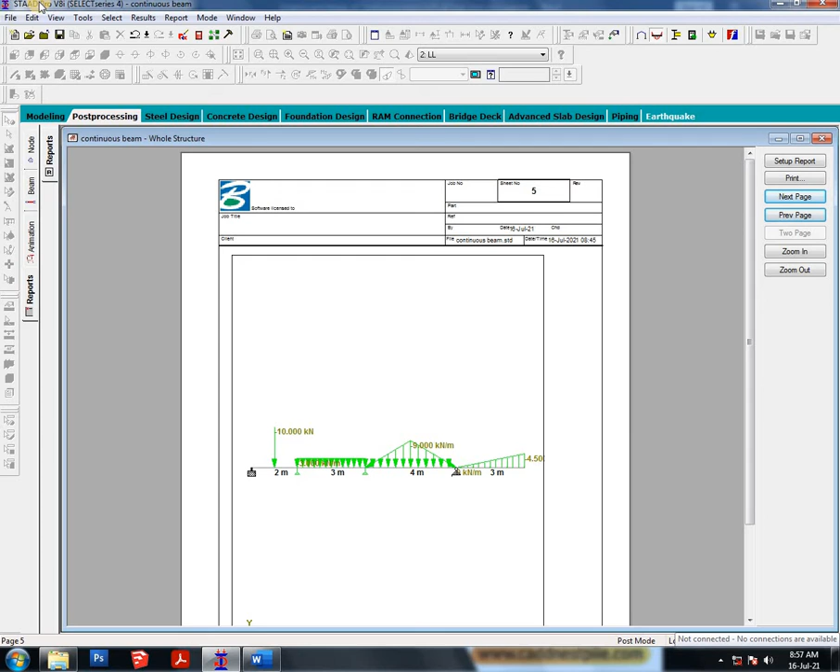File, new, the first one is space, then meter and kilonewton, then next. Here I am going to select the add beam option, then finish. The page will open. This is our user interface. Under modeling, the first step is setup, and under setup the first step is job.

Job means what our job is; for example, I will give engineering. The client means who the clients are; you need to indicate that name. I am going to give XXX here, and job number 1. Here we need to indicate the engineer name, I will give XXX, checker YYY, and approved ZZZ. Here we need to mention the dates.

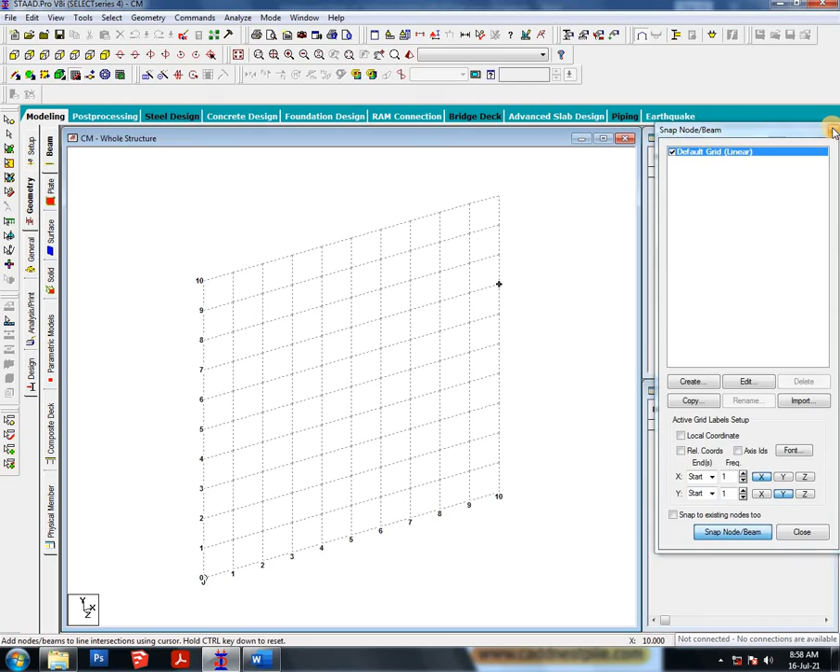Then the second step, geometry. Under geometry, the first one is beam. We can use the grid to make beams, but we don't want that. We are going directly to the nodes. Our first node will be 0. For the second node, we need to check our diagram. From the first node to the second node is 2 meters, the second beam is 3 meters, the third beam is 4 meters, and the fourth beam is 3 meters. In total we have a 12 meter beam length.

So let's go to our diagram. The first node is created. The second node is at 2 meters, so 2. The next beam is 3 meters, so I'll give 5. Enter. The third beam is 4 meters, 5 plus 4 is 9. Enter. The last one is 3 meters, 9 plus 3 is 12. Enter. Our nodes are created.

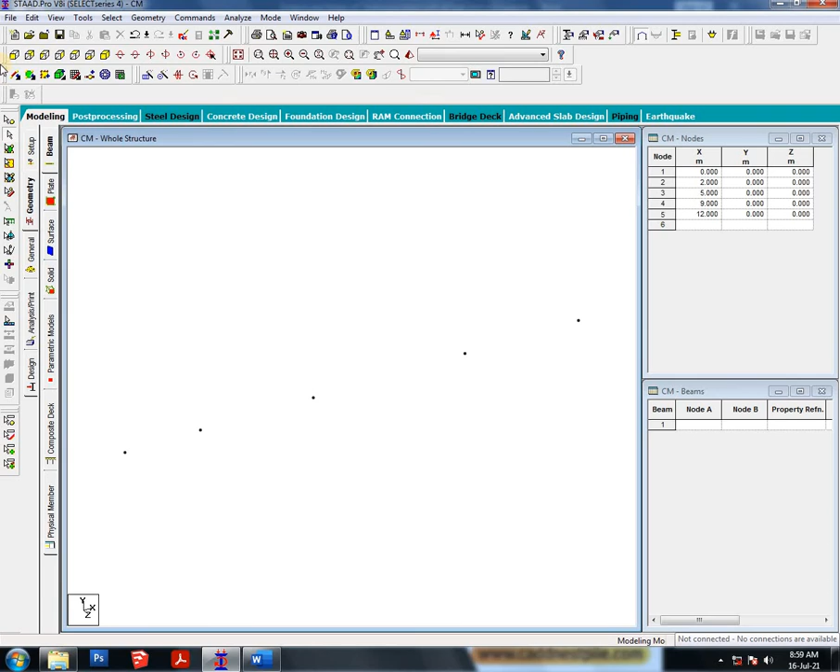Come here and go to the front view. Here I am going to select the add beam cursor. I draw from the first node to the second node, second to third, third to fourth, and fourth to fifth. Our 4 beams are created. Setup is over and geometry is over.

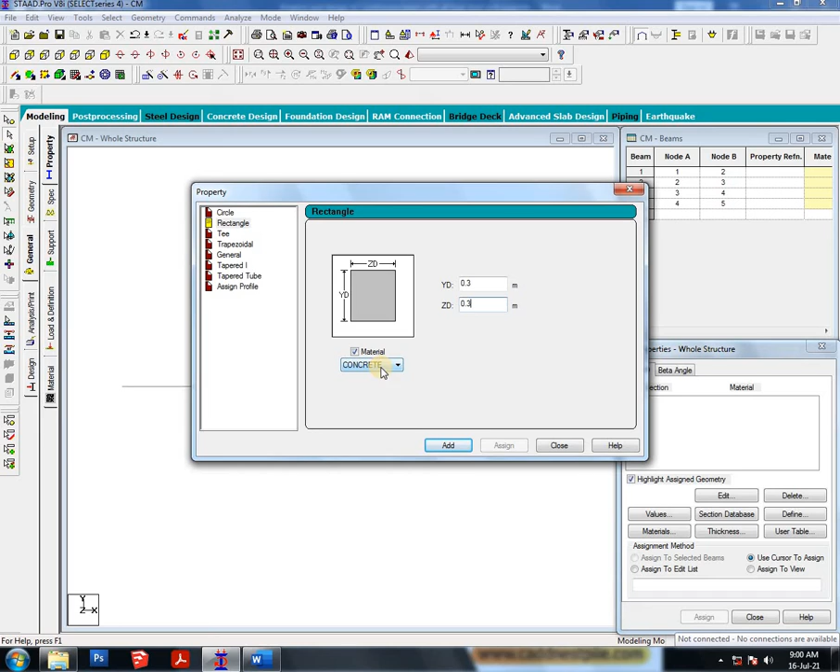Then general. Under general, the first one is property, which means we need to define the beam sizes. For that, go to define. Here I am going to adopt a rectangular beam, so I select rectangular. The first one is YD, the vertical depth; I will give 0.3, meaning 300 mm by 300 mm. I adopt concrete material, then add, close. Select this one, assign to view, assign, and then supports.

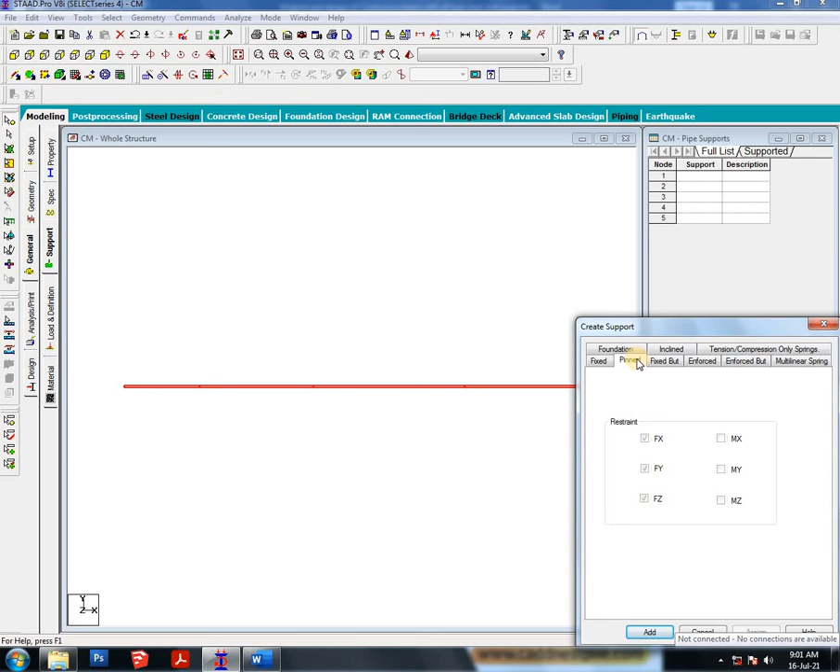See our diagram: we have three types of supports, fixed, roller, and hinged. That's what I'm going to create here. Create; we have the default fixed support, which I add. Then create again; the second one is pinned or hinged. Add and create. Here we don't have a roller support, so we select fixed support and just select Fx, Fz, Mx, My, Mz. We don't need to select Fy. Then add. Three supports are added.

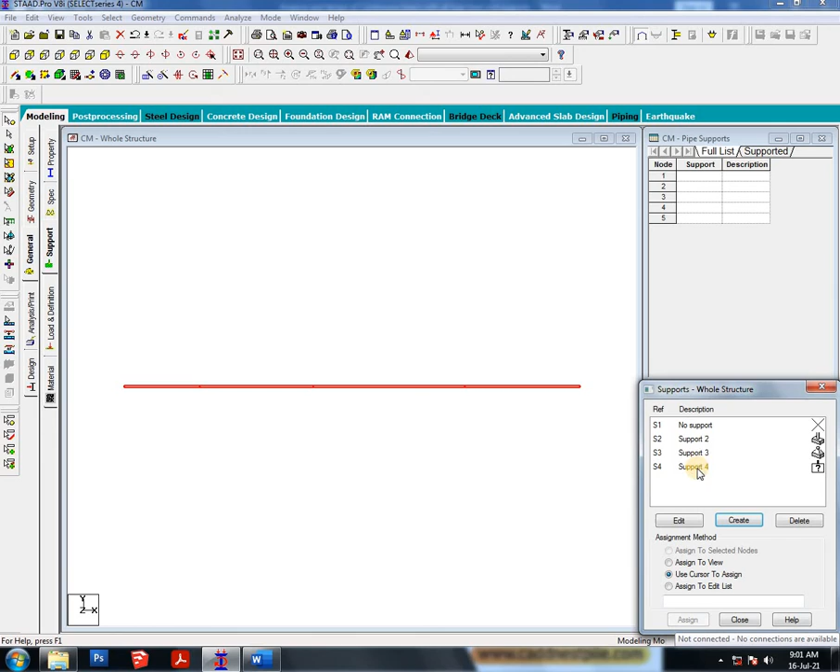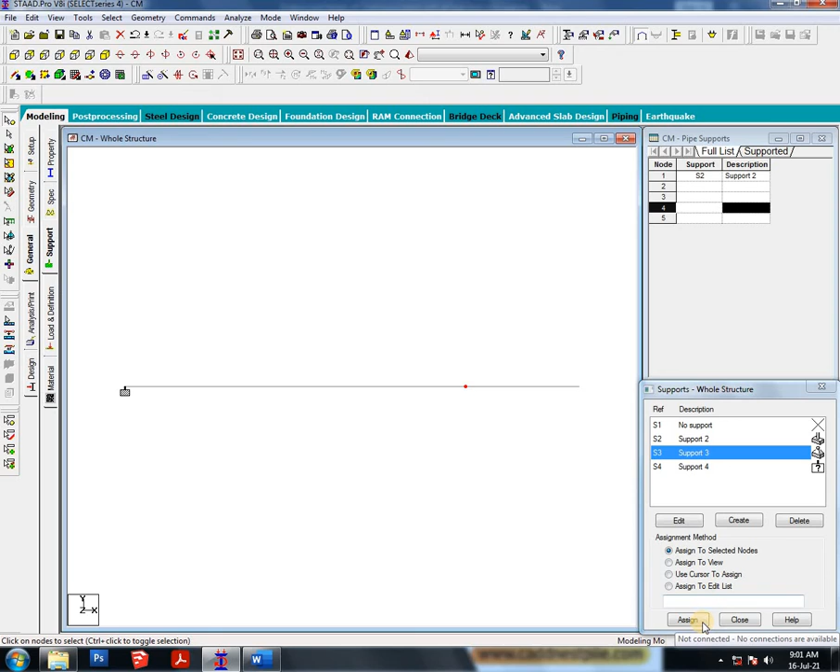Our first support is the fixed support. Use the cursor to select the nodal point, assign. Our second one is the hinged support. Assign to selected nodes, assign. Then the fourth one, the roller support. Assign to selected nodes, assign. Our supports are assigned.

Then go to loads and definitions. Here I am going to select load case details. Then add; the first one is primary. I am going to adopt dead load and rename it DL. Then add; the second one is live load, which I rename LL.

Add, then close. Go here, select dead load. Again give add. Here I am going to adopt self weight of the member as -1 in the y direction, due to downwards action. Add. See, it will be added.

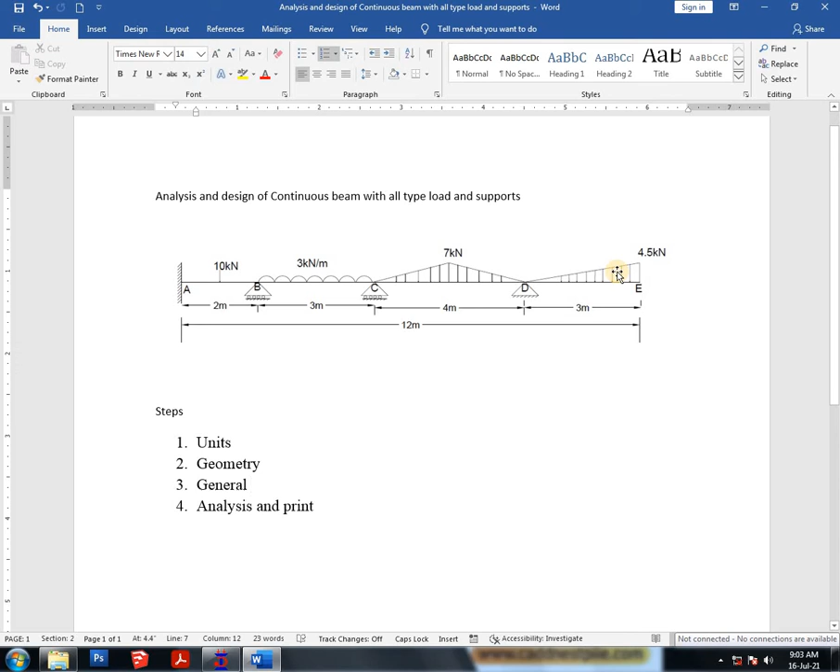Close, then select live load. Add. Here I am going to select member loads. First, see our diagram. Member load options will be activated: point loads, UDL, triangular load, and linearly varying load. First one is point load, so I'm going to adopt that. Applied, first one is point load, that is called concentrated force. See where we need to apply the concentrated force, that is called D1.

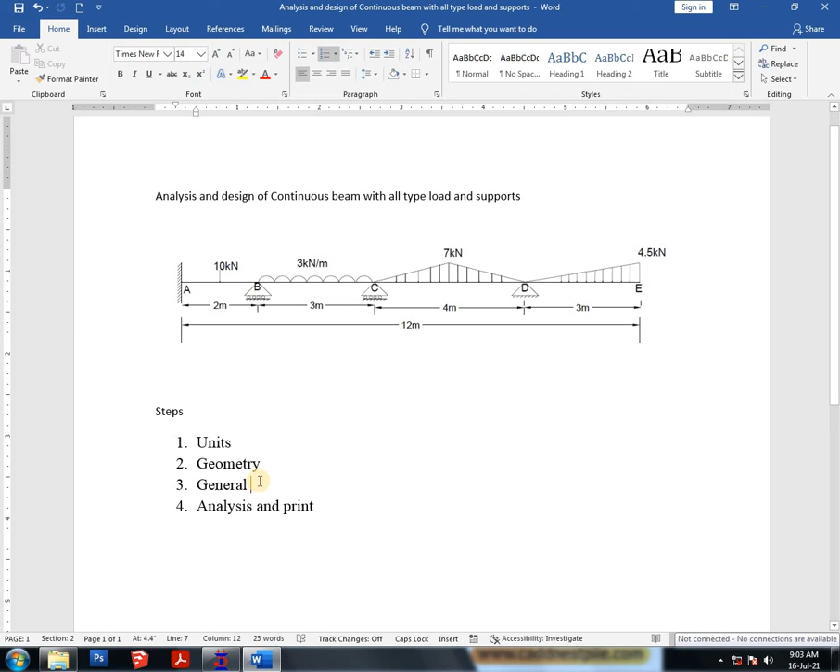My concentrated load is -10 kilonewton. So -10 here, the distance will be 1. I'll adopt 1, here is 0, here is 1, and I'll go to add.

Second one is uniformly distributed load, that is uniform force. I'll use -3 kilonewton. I need to activate the entire beam, so I'll give 0 here, due to global axis Y.

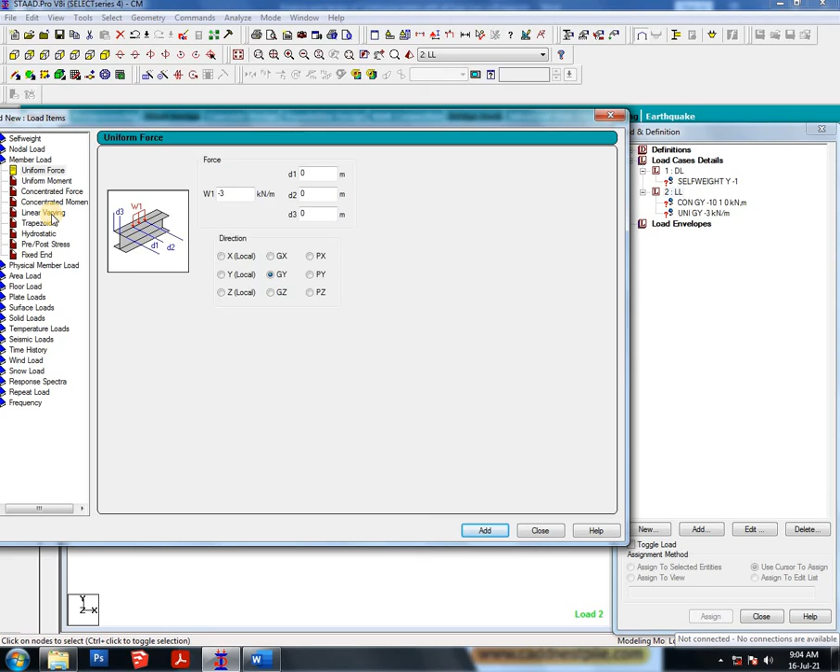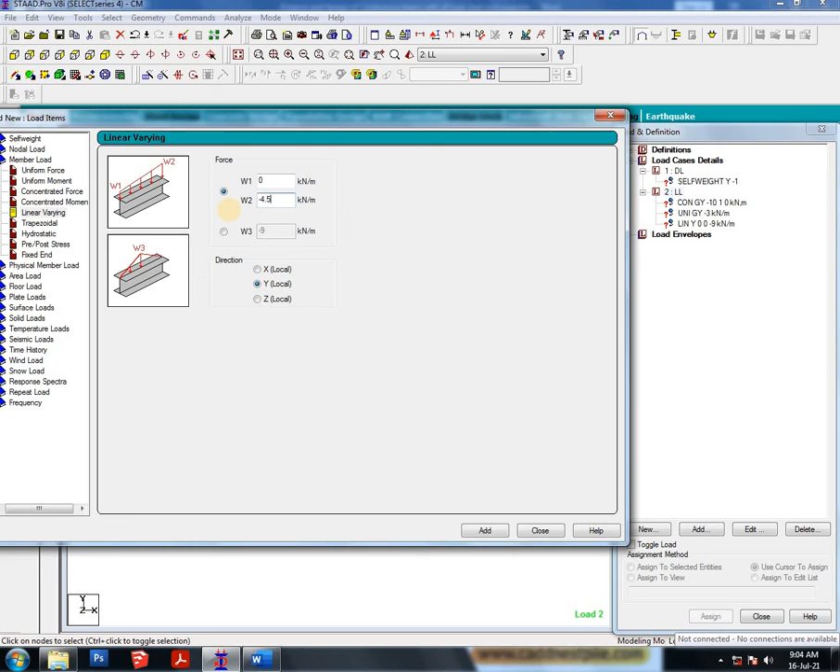Add. Third one is triangular load, so I'll go for the linearly varying triangular load. I need to activate triangular, that is -9 kilonewton. Add. Fourth load is uniformly varying load, starting point 0 and ending point -4.5. Okay, then add and close.

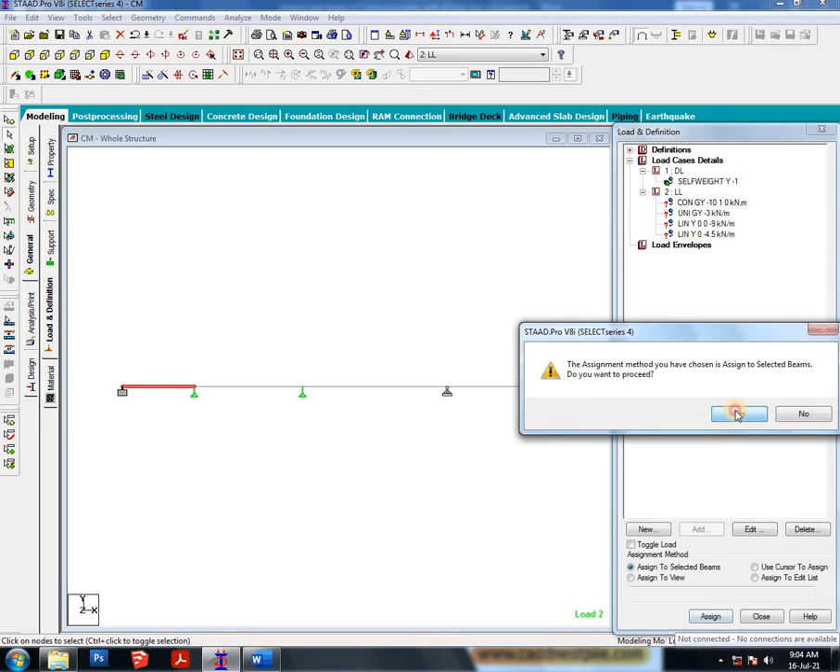Our load will be activated. Select self weight, assign to view, assign, and select the second load. I'll select the beam, assign to selected beam, assign. For the second beam, select the second load, assign to selected beams, assign. Third one, selected beam, assign to selected beams, assign. Fourth one, assign to selected beams, assign. See, our load will be activated.

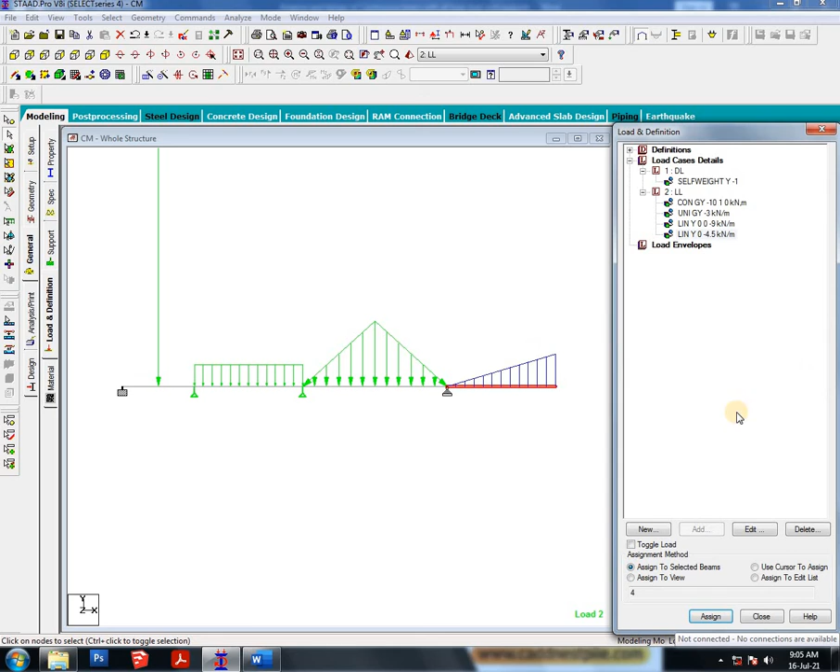And then fourth one is material. See, already the material is assigned, no need to assign here, so I'll give close.

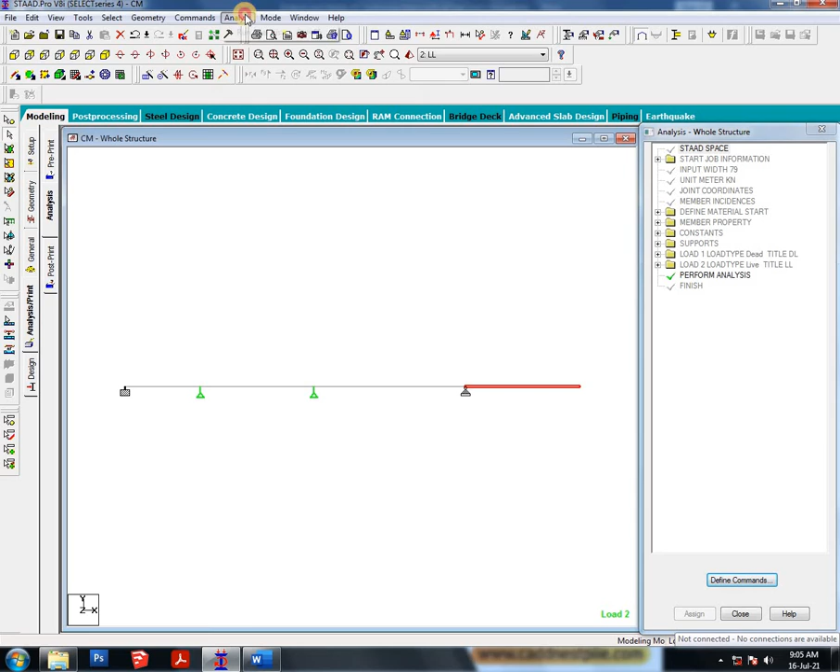Then finally analysis and print. Here we need to give no print options, then add, close, and run analysis, save. We need to wait a few minutes because the report will be generated. See, our project has 0 error and 0 warning.

Go to the post processing mode, done. Select both load conditions, apply, OK. Here we need to check our deflections, using control with the scroll button. See, this is our deflection.

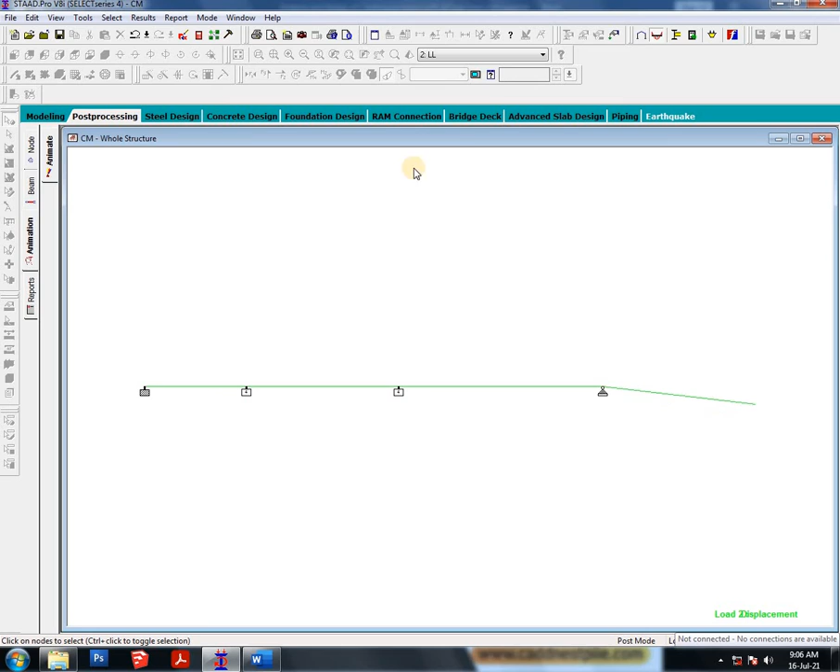Go to animations. Here we need to select the deflections, apply, OK. This is our deflection diagram. Then press escape, go to result, view values, beam result. Here I am going to activate bending and shear values. Then annotate, okay, okay, close.

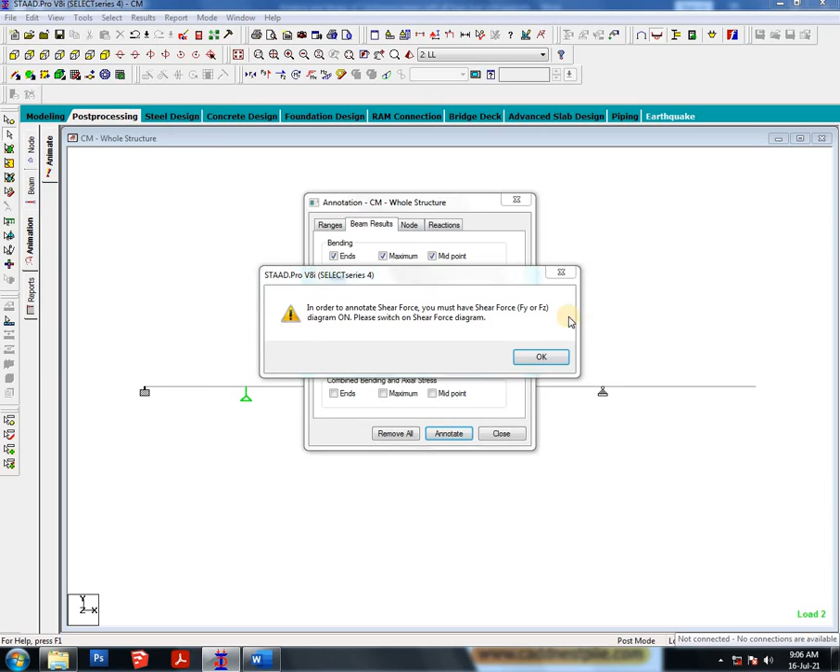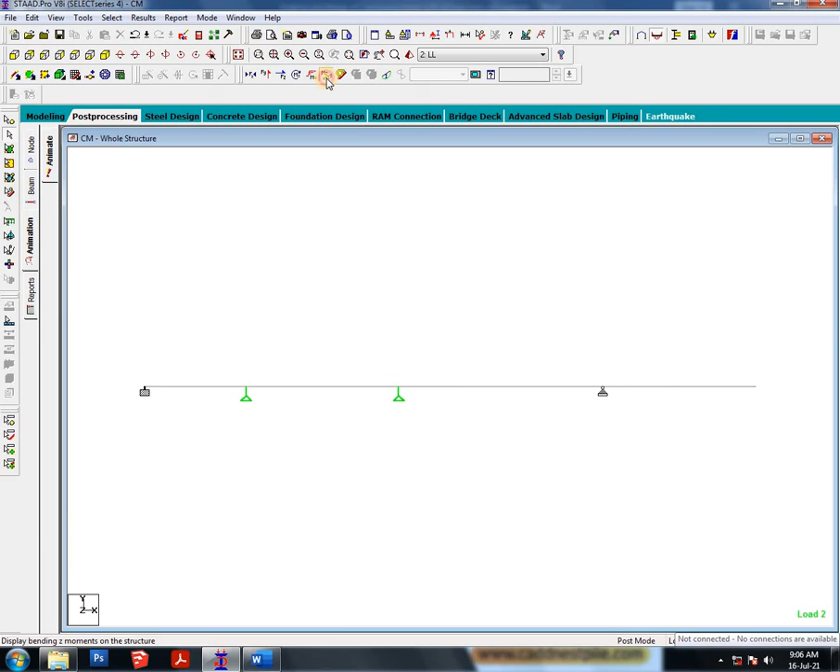Here I am going to check. See, this is our shear value. I need to take one photo, so I'm selecting the picture option. Deactivate FY. Second one is bending moment. See, this is our bending. I'll take one photo of this too.

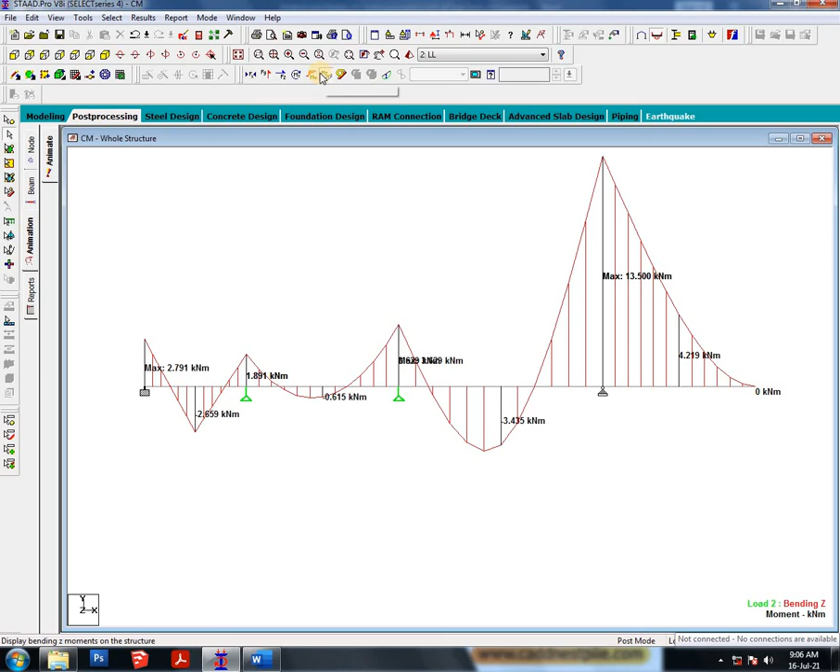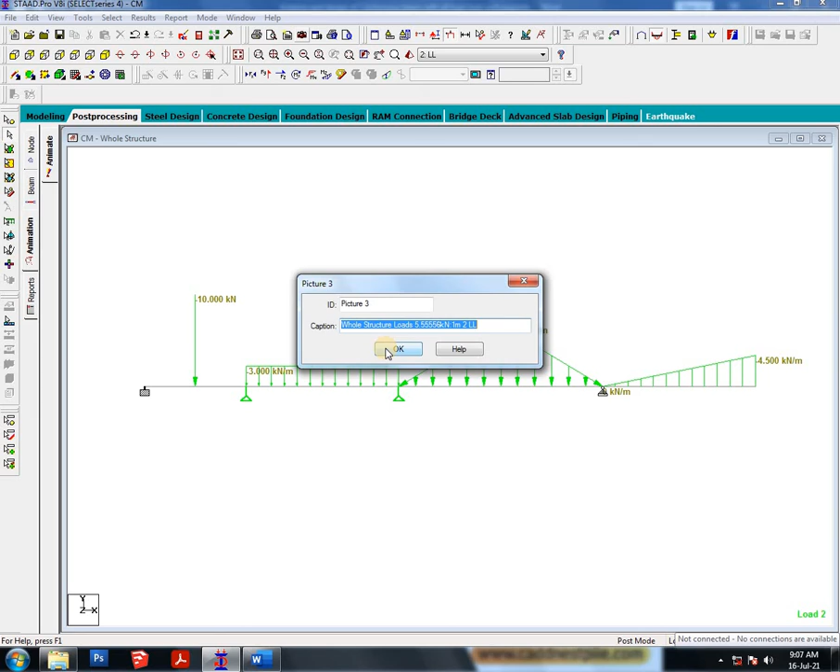Okay, then close. I applied all the load conditions, and also I need to see the values, so I'll go for scale and labels, load values. Apply. Okay, see, this is our beam. I'd like to take one picture of this too.

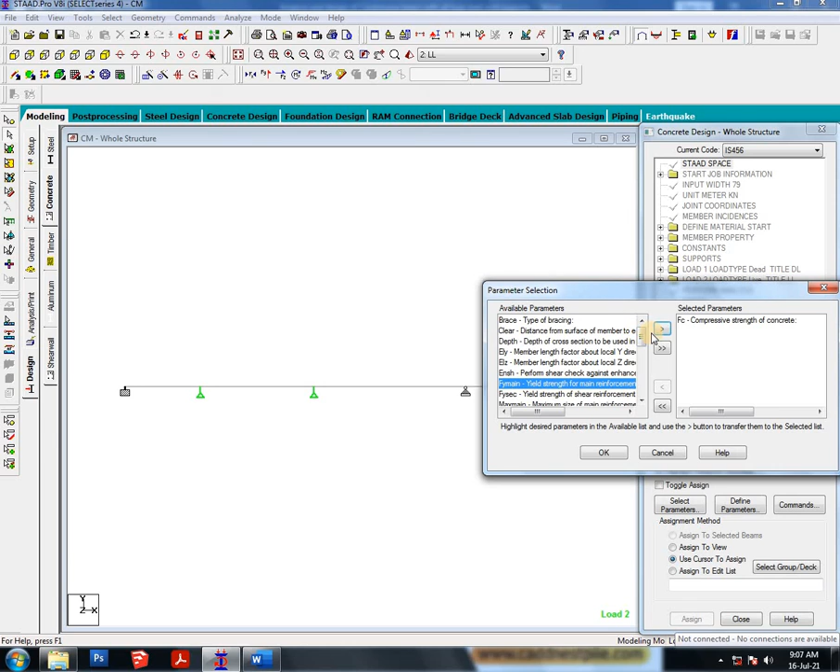Then go to modeling, select design options. Here I'm going to do the concrete design. I selected concrete, and adopted IS 456. Select parameters, drag this side, select. Here I'm going to select FC and Fy. FC means compressive strength of concrete, Fy means yield strength of steel.

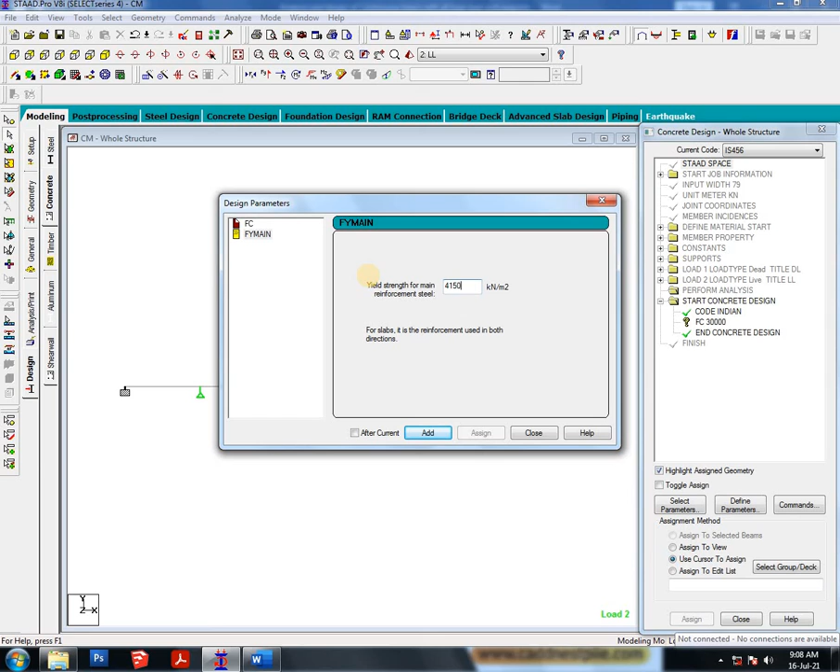Define parameters. For FC I'm going to adopt M30 grade of concrete, so 30,000. Add, and for Fy I'll use 415, so 415,000. Okay, add, close. Then commands.

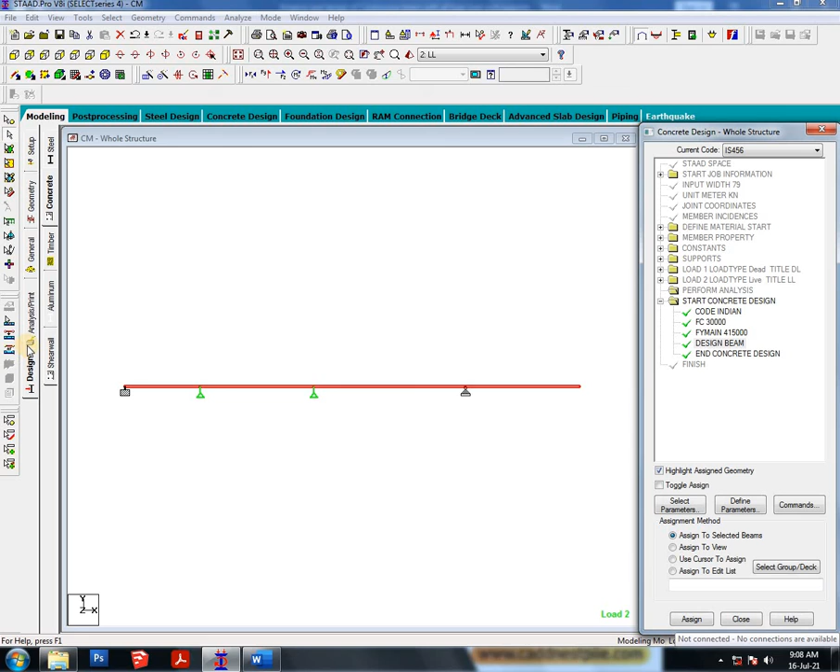Here I'm doing the design of beam, so I'm going to select design beam. Add, close. Select this, assign to view, assign as Fy, assign to view, assign as, then beam, assign to view, assign as, and finally, same procedure as usual for analysis and run analysis. Save.

Waiting for the process of reporting. See, this is also 0 error and 0 warning. Go to post processing mode.

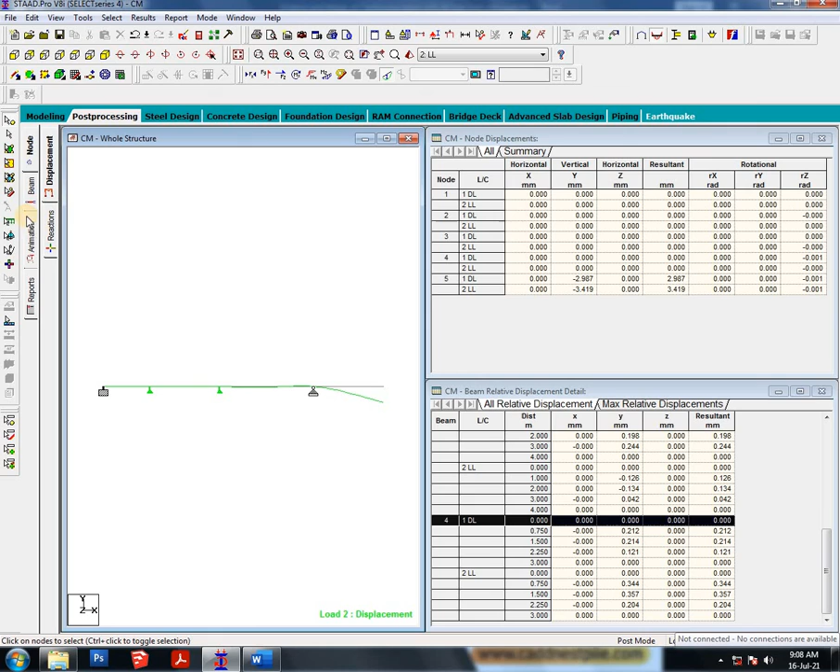Done. I'm going to select any one beam, using the beam cursor. I'd like to select this beam. This is our geometry of structure. Our geometry: the first beam is 2 meters length and depth is 300 mm. Then property - what are all the loads we applied?

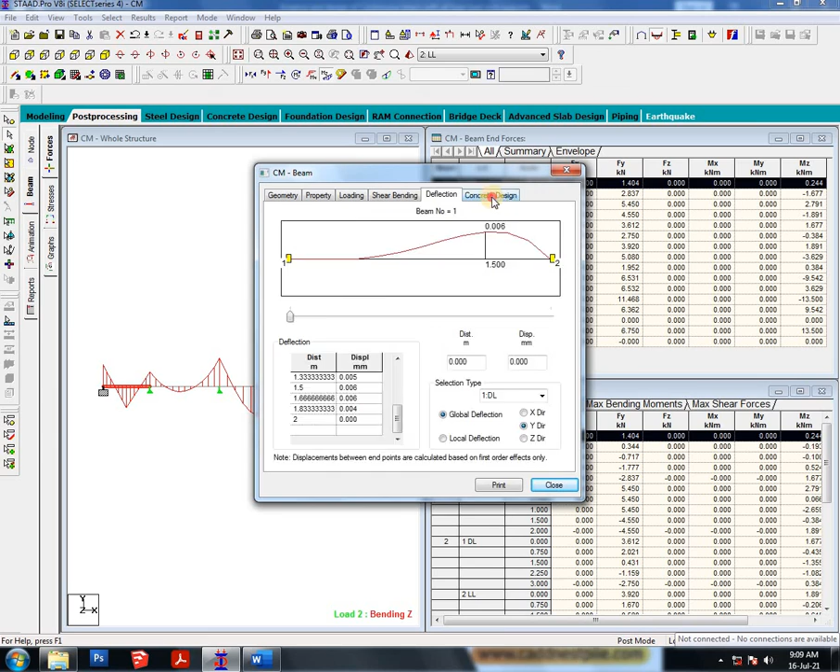See, all loads show shear and bending of our selected beams, and deflection in y direction, and then concrete designs. Okay, then close. Finally I'm going to generate the report.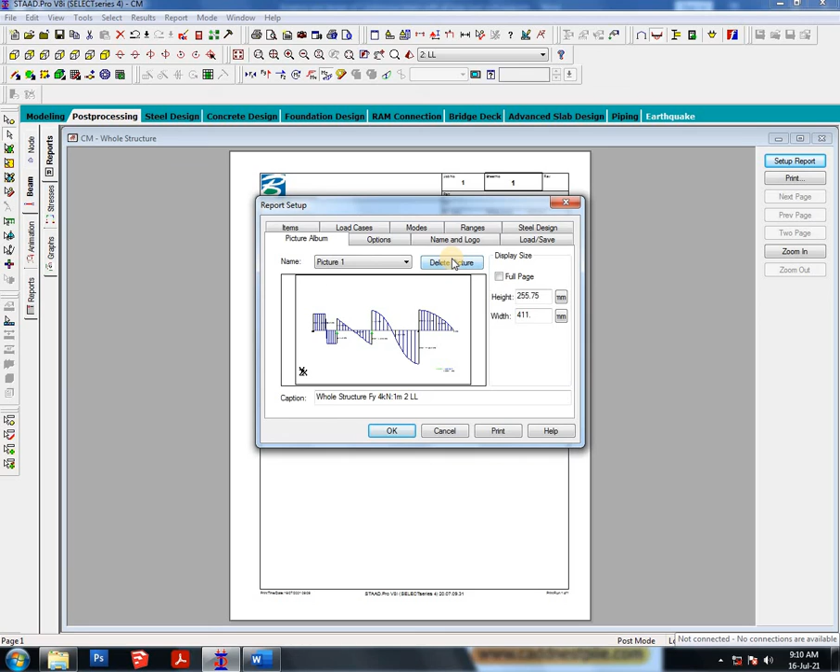That's what I'm selecting, the report options here. Job information is already selected. Then go to picture album. See, we need to check - you can rename, or delete, everything is possible here. For items, I'm going to select the picture album, pictures, drag this side, then okay.

See, our report will be generated. This is our page, showing the job information we provided. This is our first page, and you need to scroll down for the second page - go here for the next page option.

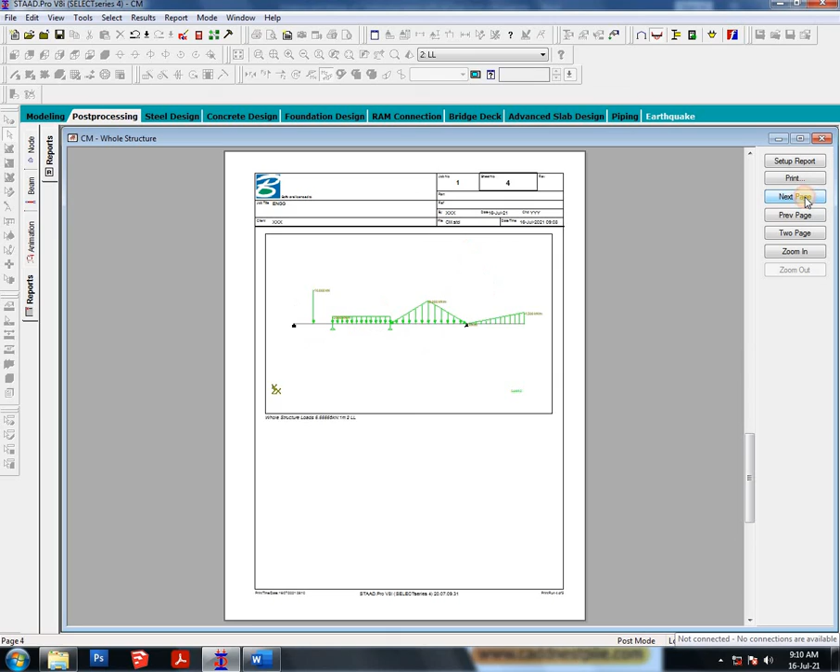That's it, this is the procedure for continuous beam. Our beam will be safe.